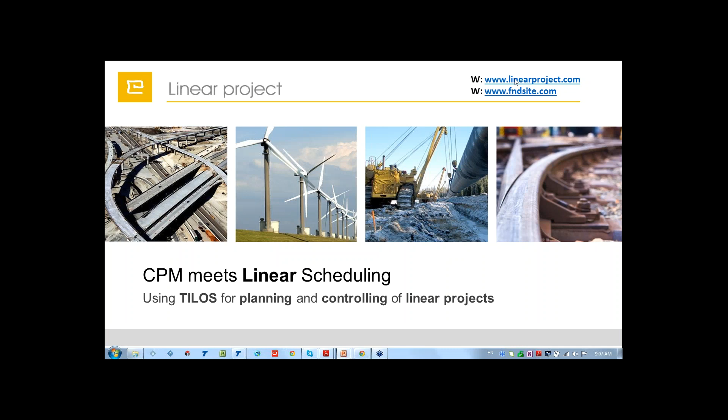So, who is Linear Project? Linear Project actually previously owned the TILOS software. It's a German product; however, it was acquired recently, at the beginning of 2015, by the Trimble company, and it's been on the market for more than 20 years. Currently, TILOS software is available in more than 10 languages, and in the market, all of the 10 major European construction companies use TILOS for their controlling and scheduling.

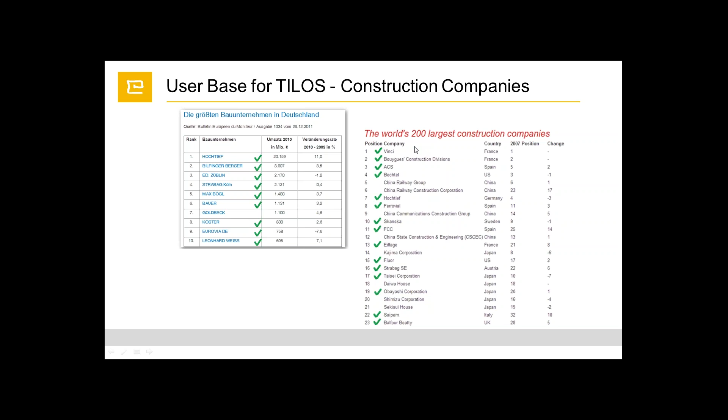Also the Asia customer map. I see we have a lot of people from Asia and Europe who are attending today's webinar. We're very glad to see you here.

So, what are linear project characteristics? As we all know, a linear project has an axis where the work is being performed. In this case, we have pipeline, railway, highway, tunneling, engineering, and transmission lines. One of the characteristics of a linear project is that we have repetition of each activity. So we have repetitive activities which go all along the project, and our goal here is to optimize the productivity rate, reduce the project duration, visualize the project area, which is very important, and I'll give you more information later on, and reduce overall cost.

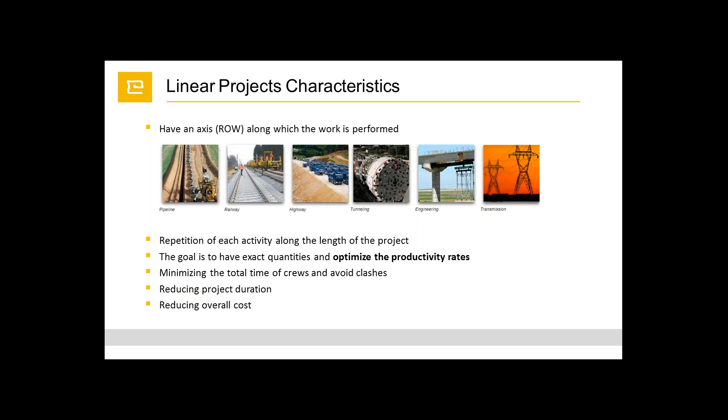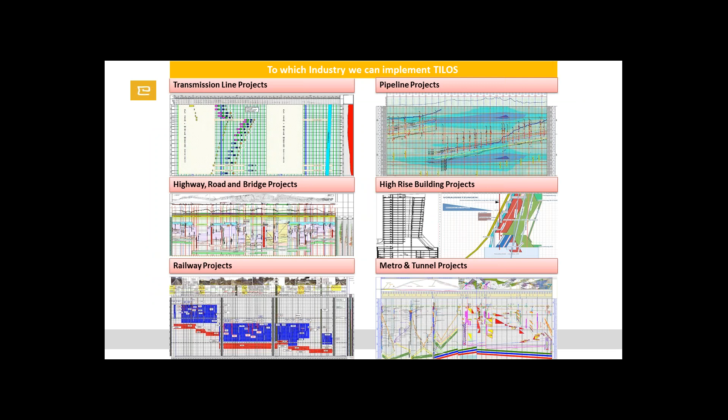To which industries can we implement TILOS? We can implement TILOS on all linear projects, such as transmission line projects, highway, road, and bridge projects, railway projects, pipeline projects, high-rise buildings, metro and tunnel projects. One of the biggest advantages, as I mentioned previously, is the visualization of the projects and the reporting. On the left side, we have a traditional CPM plan and report. It's around 40 pages, and we have everything in one page in TILOS. So in TILOS we have every information on a single page.

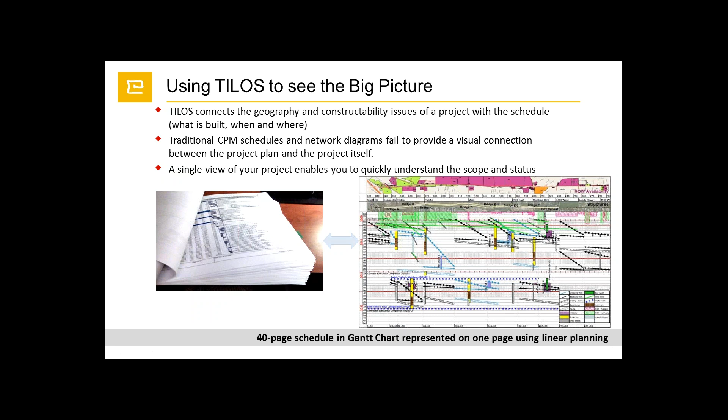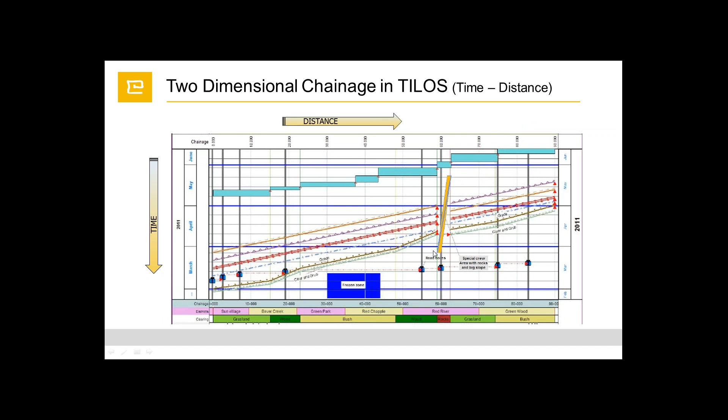I'll give you the main idea of how we can analyze TILOS reports and how we can actually prepare the work. In this slide we have a traditional Gantt chart where we have only one axis, which is time, as in Primavera P6, MSP or Asta Powerproject. However, in TILOS we have a two-dimensional chainage: the distance axis and the time axis. This way we are able to see where our activity will be performed and when.

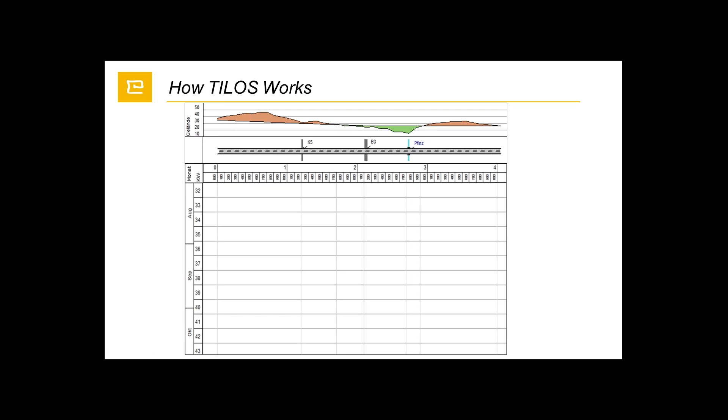So let's say we have first activities, which is the topsoil, and we are starting from the left side of the river, and it will start from 2,600 meters and goes all along to the beginning of the project, and this activity will take 3 weeks.

So by this way we are able to see, for instance, when we will be at a certain point. So let's say at 1,500 meters our activity will have to be done until almost the end of the second week of August. Then we're moving our crew to another side of the river and doing the same activity, which is the topsoiling, and it will take us 2 weeks.

Besides that, in TILOS, beside the linear activities, we can do the structural activities as well. So we have here the bridge, and we can show it as a summary task, or we can show it as a detailed bar. So all the steps of the bridge we can indicate here.

We are also able to show not only straight lines; we are able to connect these lines to the quantities. As an example here, this cutting activity has 2 breaks. And why? Because we can see on the elevation profile we have a cutting amount which is less, so it will take around a few days to complete from 1,700 to 1,200 meters. However, from 1,200 until 700 meters we have a bigger amount, so our activities will take more time to finish.

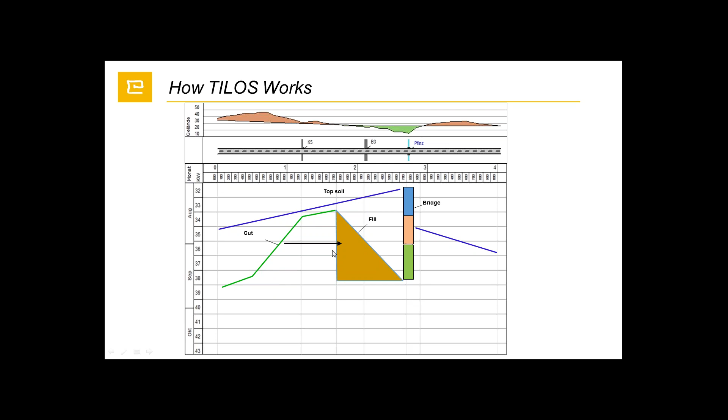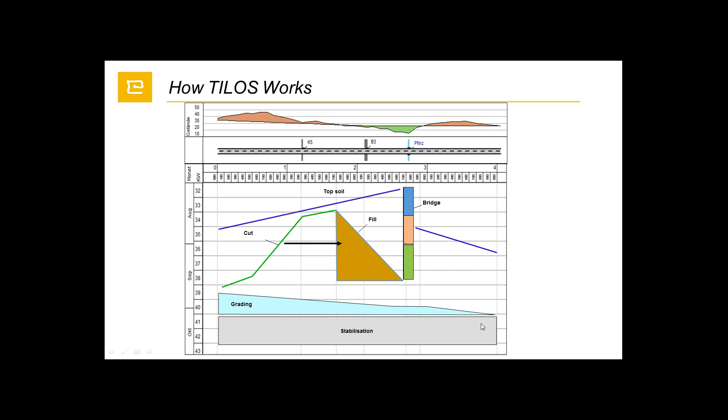At the same time we are able to put the hammock task. In this case, we are putting a rectangle here, which gives the understanding that we cannot perform any other work until we fill this area. So this area should be filled before we perform the next activities. And then we have a standard grading, which goes from the beginning until the end of the project, and the stabilization. So simply this is how TILOS works.

Beside that, TILOS gives us opportunity for clash detection. So as you see, we have here the pipeline sample. We have an elevation profile, a distance axis and the time axis. In the middle of the working area, we have a restriction area, so we cannot perform any other work during this time in this distance zone.

So let's say we have one activity, and we can see that there is a clash. This activity is starting from the beginning and ending in the middle of the project, not in the middle of this area. So we can see that we have here our clash. However, as the project engineers or project manager, we decided to postpone the beginning of our activity 1 week later, but we could also stop our work when we come to this point, and after this time passes we can continue our works.

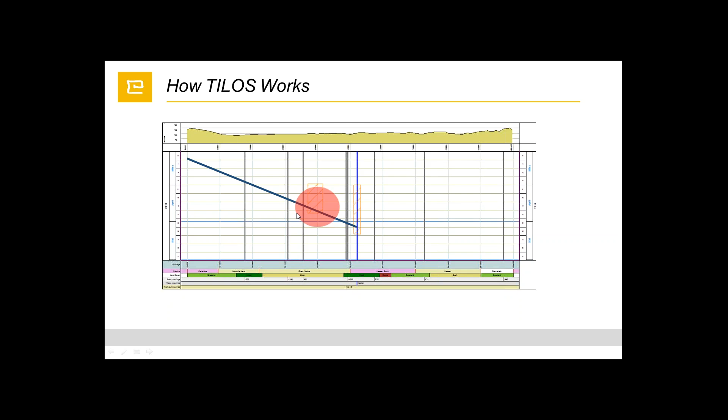However, we decided to just postpone the beginning of the activity, and in the same way we have a second activity. And I would like to take your attention to this traditional CPM scheduling. The first task is starting in March and ending almost at the end of May, and the second task is starting at the end of March and ending in the middle of June. So we cannot see any clash. However, if you look at TILOS, we can see that we have a clash.

This is actually the clash detection option in TILOS, and TILOS does not give any options for how we can solve it. It's up to the user whether he would like to postpone this activity, reduce the work rate, or stop this activity.

Moreover, we can give the lag, which the traditional CPM gives us as time-based. In TILOS we can also give it distance-based. So as you can see here, we have a minimum distance like a 2 kilometer lag. These two activities cannot be performed closer than 2 kilometers.

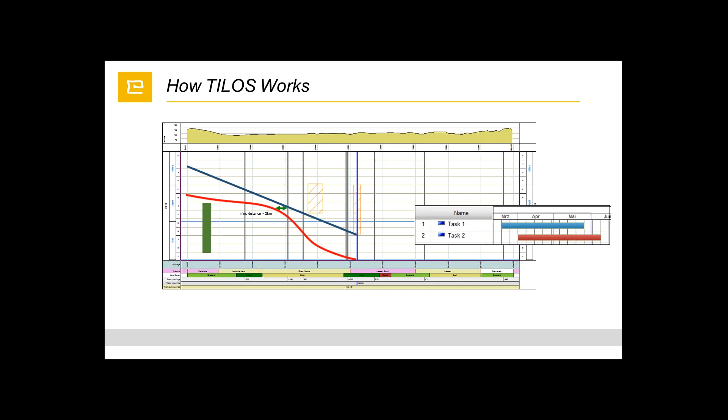Okay, project controlling. We have information including the clearing activity name, the date, the start date and the end date, start distance, and the end distance.

Beside the linear scheduling, it's also available to give a detailed report on the progress. As we can see here, we have the main activities, sorted main activities, and a data date. Also the main activities for grading, clearing, grubbing, grading. We have a progress dashboard where we can see actual progress planned, the quantity, actual quantity - all of this is editable, and we can put any information which we would like.

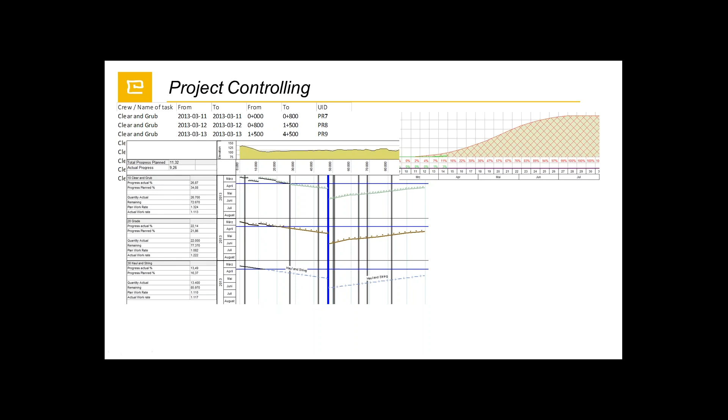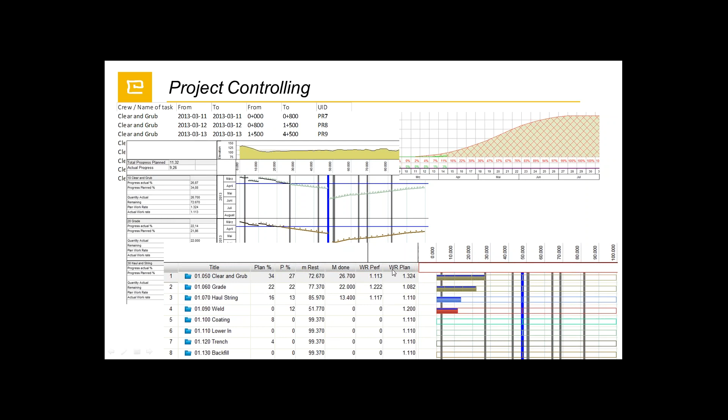Moreover, we are able to provide the S-curves, and we are able to provide the Gantt chart on a distance basis, not time based, but also distance based. So we can see here the distance, and information about our activities, which is the planned percentage, progress percentage, the work rate performance. Any information you'd like to see, we are able to display it in TILOS.

Okay, as I mentioned before, TILOS has a GIS model, which is the Google Earth integration. It's called the TILOS Progress Map. We are integrating the TILOS application with Google Earth and getting the reports directly from Google Earth. In this case, we'd like to get the visual view of our project.

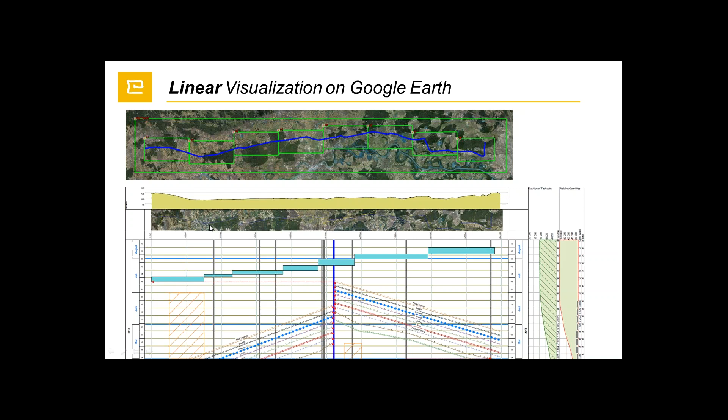So as you can see, we have a graphic illustration of our project on our TILOS working area, and we would like to see the progress. So what is the progress monitoring on Google Earth? Well, it is the ability to see the visualization of our actual progress on our working area.

So let's say we have a blue line, which is our right of way, where we have our working area. Below we have the TILOS working area, so we are indicating the main activities. In these slim lines is the main activities, which goes all along the project. So let's say on Monday 22nd of April, our crew is starting working here, or our activities are going to be performed over here, over there. These highlighted parts are where our actual crew is being worked.

Then on Monday, May 6th, we can see that our crew moved from this point to this point. Beside that, we are able to show the cumulative view. So what we have here is two crews, starting from the beginning of the project and end of the project. We are able to see that the highlighted parts are actually performed parts, and we have the rest part where we will have to do our work.

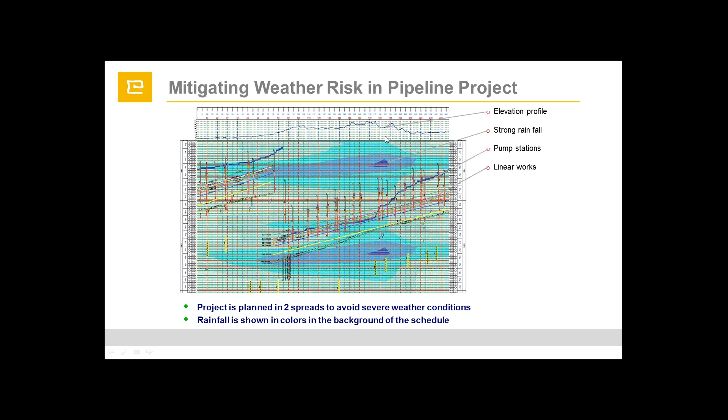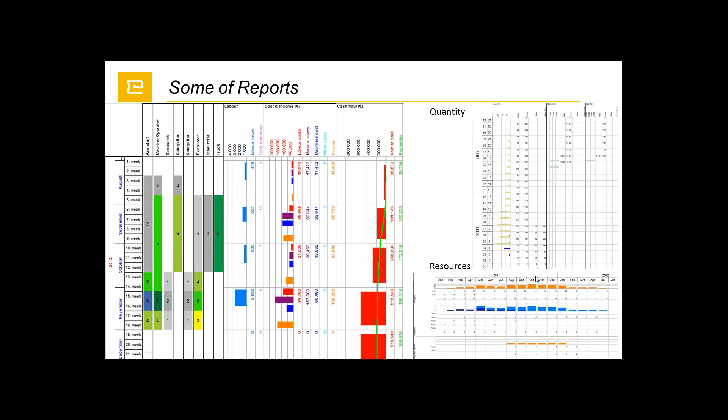TILOS has a quite good data exchange model. We are able to get data from the clipboard or from Excel. Moreover, we can get information from the most used planning tools such as Primavera P6 or Microsoft Project or Asta Powerproject. So if you are mainly using Primavera, you can use TILOS at the same time as well.

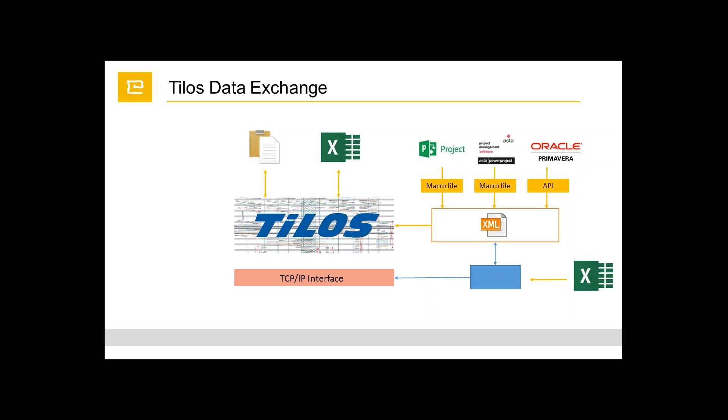I'd like to show you some of the pipeline projects which are actually being used by TILOS. This is the project which we are using. I'll give you short information and go through it.

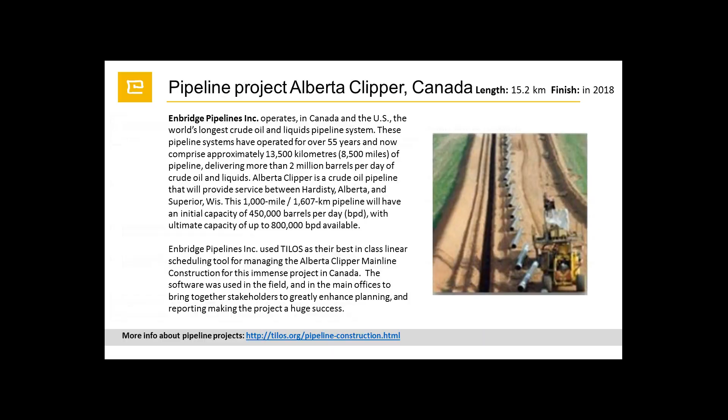This is a pipeline project in Canada. We have the Enbridge expansion, and the Chevron Pacific Trails pipeline.

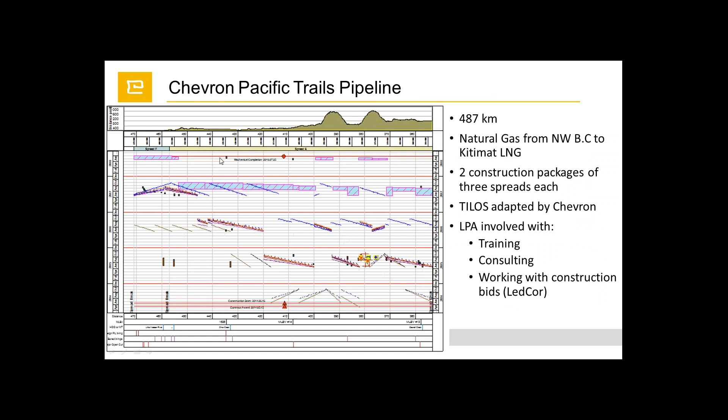As you can see, we have the distance and the time, all activities performed over our distance. We have the Energy East Pipeline Trans-Canada, which is one of the biggest pipeline projects. And we have the Trans Mountain Kinder Morgan pipeline project, the Northern Gateway, and Trans-Canada Keystone.

Czech Republic. We have a Gazelle gas pipeline.

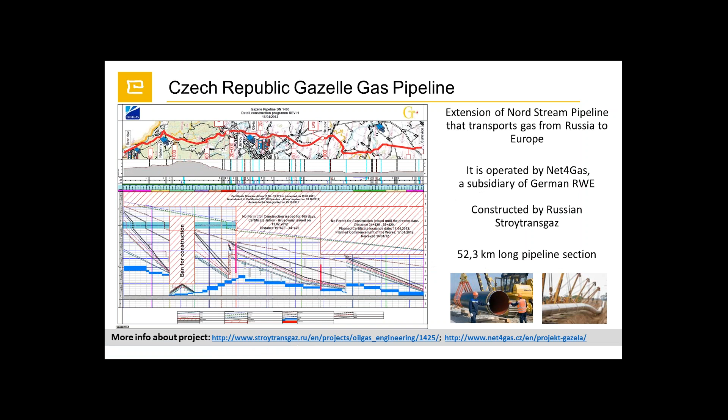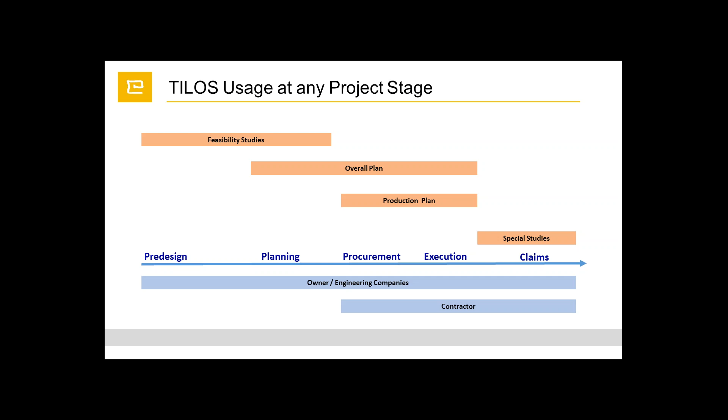Let me give you short information about where we can actually use TILOS, in which project stage we can use TILOS. We can use TILOS in any project stage. It can be feasibility studies, overall plan, production plan, special studies, and also for pre-designing, tendering, planning, procurement, execution, or even claim analysis. It can be owned by the owners, engineering companies, contractors, or subcontractors.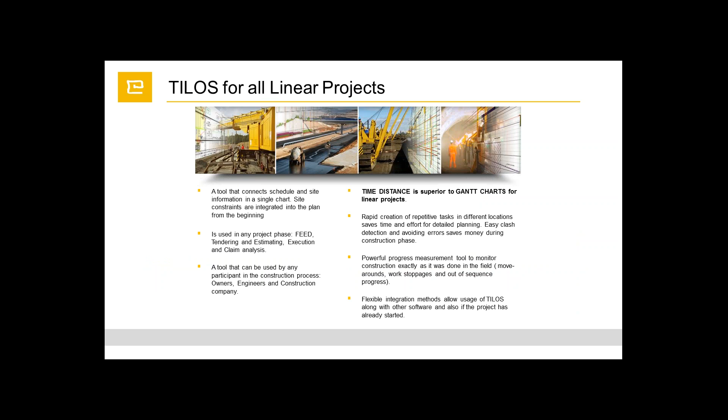This is much all about my first part of the presentation. Let's switch right now to the demonstration part.

So we have the TILOS interface. We have a ribbon, and we have the TILOS Explorer for quick navigation. We have a properties bar below, and we have the main working area here.

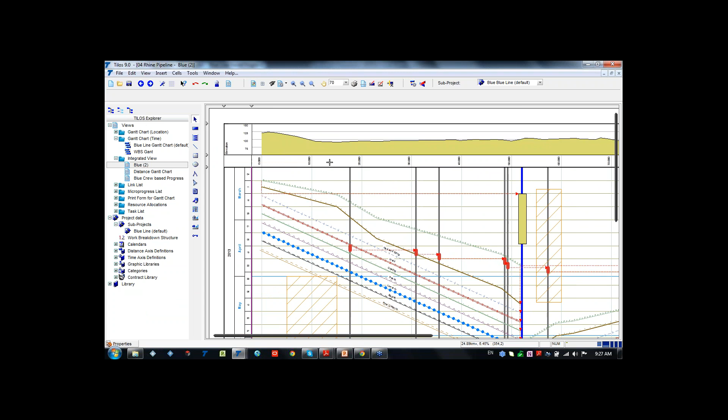As we can see here, we have the elevation profile. We have a distance, which shows this is a 100 kilometer project. Then we have a time axis.

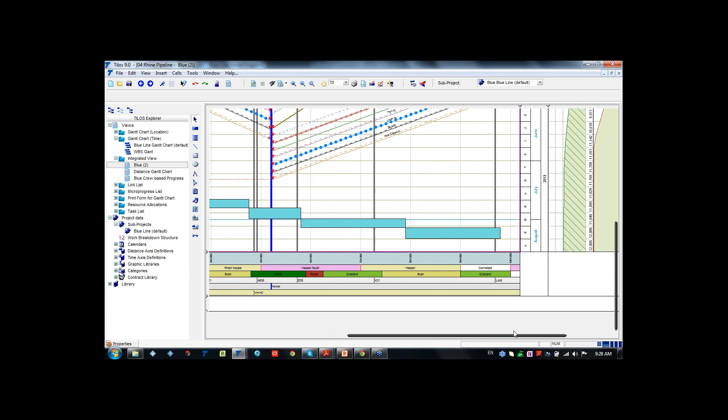We are able to show the sectors, the districts, in order to make our work easier. For instance, if you have dedicated subcontractors working on the same project, we are also able to show that, so we can divide the works on the section districts. All this information is editable according to your wish or requirements.

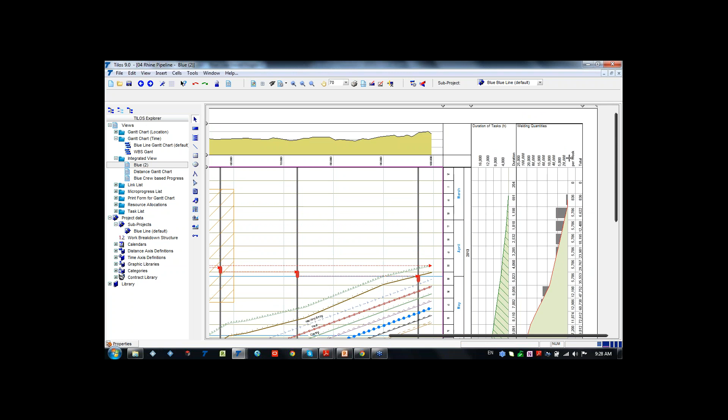We have a report, which is the duration of task reports, the S-curve. Also the welding quantities here. It can be cumulative or not.

We have the main activities here first, which is the clearing and grubbing activities, and we can easily see where our activity is going to be, the duration of the activity, the start date, the end date, even the hours. On the properties bar, we're able to see more information, such as which WBS it belongs to, the task ID, and which calendar it is using.

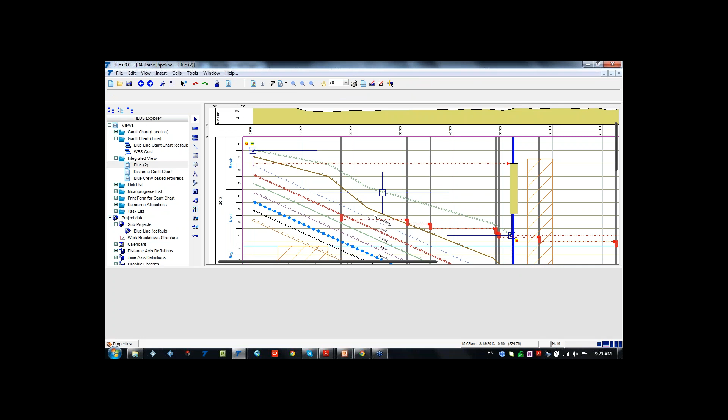The calendars are actually editable. You can edit your calendar according to your requirements. Then we have categories and structures information, the display information. This is a task which we can actually edit. All these cosmetic works are done by the user.

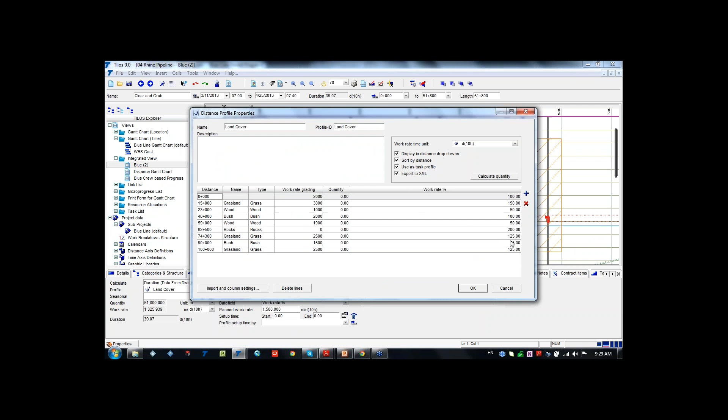The calculation method - we have several calculation methods. In this case, it's getting information from the profile data, which is a land cover, and we have all information over here. We have a work rate, the quantity, the work rate percentage. By this way, we are able to see several calculation methods: work rate, duration, length, duration speed from the profile data, from the duration from the distance profile, or from the sector profile.

We have links, we have standard linking options. Let me show you the linking options. We have here the standard linking option - it can be start to start, start to finish, finish to start, finish to finish, or calculate the meeting points. We are able to put the time lag, or we are able to put the distance lag as well.

The next activity is, for instance, the welding activity. We are able to see the coordinates here, not only from the top overview, but from the detail bar as well. We can see our allocation, resource allocation, actual. I'll show you right now - we don't have any actual data, but I'll show you the actual one.

The progress methods - some of the progress methods, such as percent split, the quantity split, the distance split, the task steps, percent simple, quantity simple.

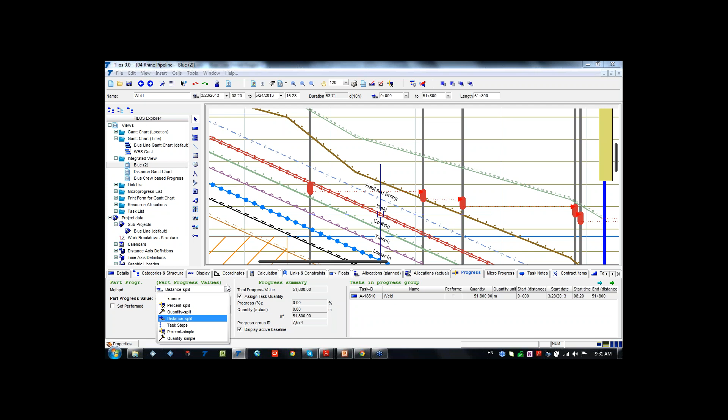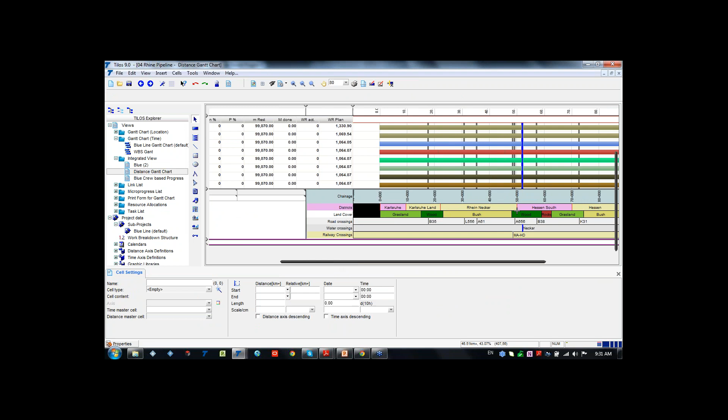Beside that, we have a traditional Gantt chart, but this time distance based. So we have main activities, or any activity you'd like to show, no problem, it's possible. And we have our activity. Also we have indicated here our sector profile and the progress, but this time we don't have any progress entered, and I'll show you in a minute the same project with entered progress details.

Main task list, we're also able to see our task list here. If we have any WBS or summary activities, we're also able to show it.

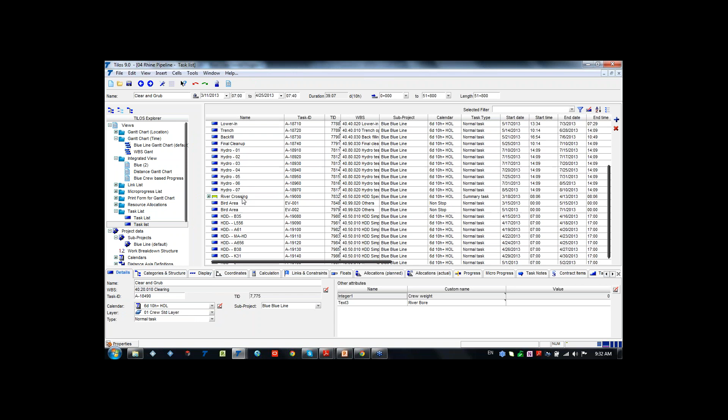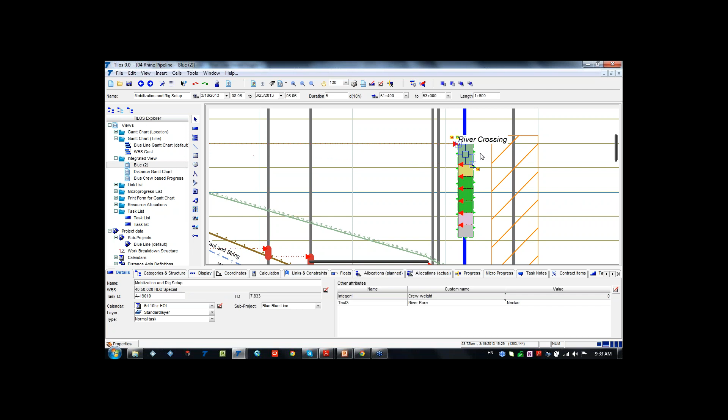The summary task on our time distance area looks like this. So this is a river crossing. Once you would like to see the detailed information, we're able to see it. For instance, right now this is mobilization activities, this is pilot hole, reaming, and so on. So once you don't need to see it, you can just switch it off, or hide it if you would like.

Okay, let me show you right now the example with the progress entered. As I've shown you previously, we have a dashboard here. We have information about the activity. We have entered our activity. We have a data date here. We have entered our baseline and actual information.

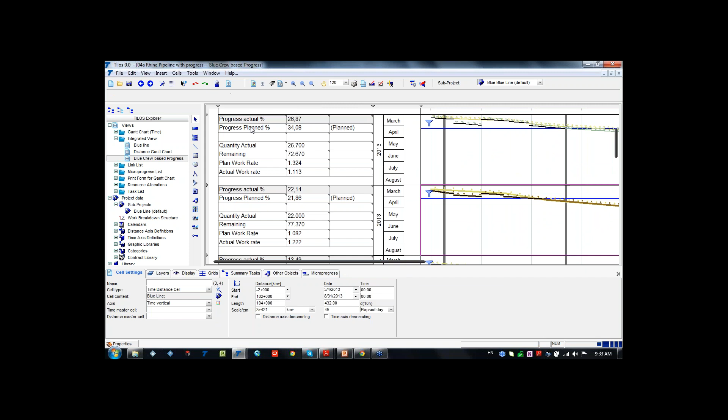By the dashboard, we're able to see progress actual, progress planned, then the quantity actual, or remaining part, the work rate. So all information is available in order to prepare good planning or scheduling.

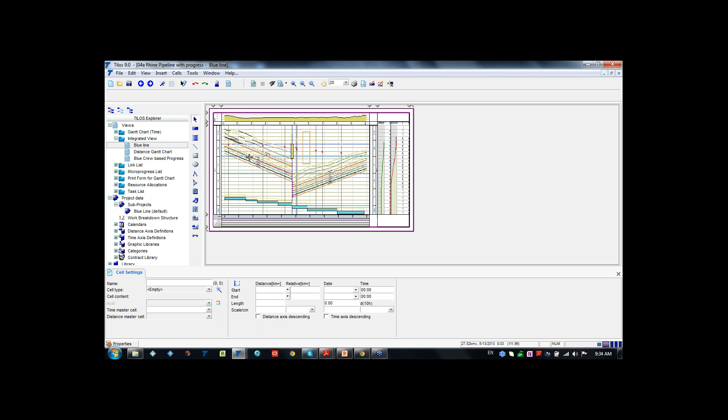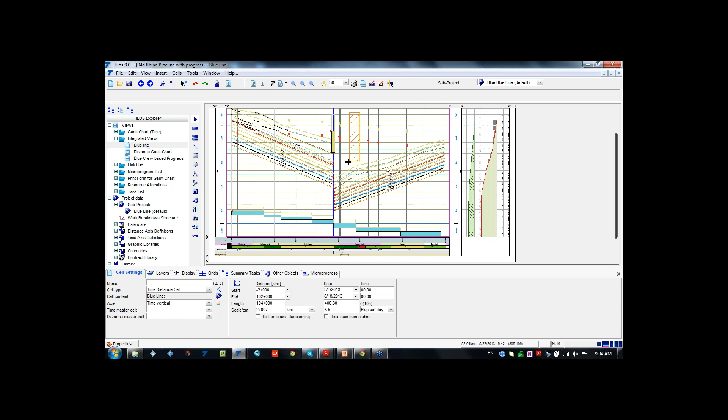On a distance Gantt chart, all this information is simultaneous. Let me show you how it actually works. By this view, we are able to see that all the information we are entering in our working area is synchronized with the elevation profile, or with the data, with our histograms. So if you change any information here, for instance, it will also be changed on our Gantt chart.

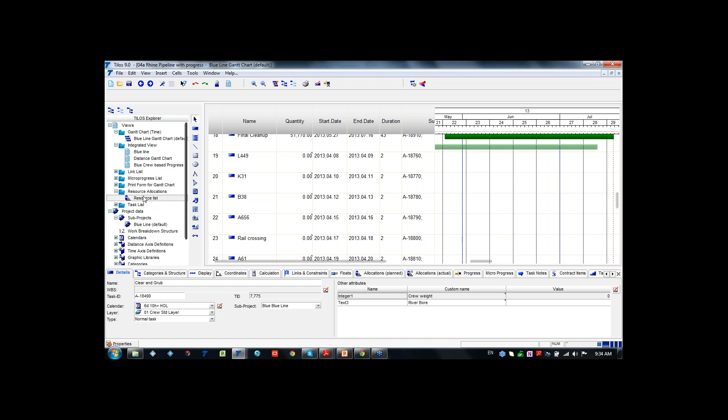Besides that, we have a traditional Gantt chart, which is time-based. We have a resource list. All this information as well we can edit, this is up to you. We have calendar information. We can indicate the non-working times, some exceptional days such as holidays.

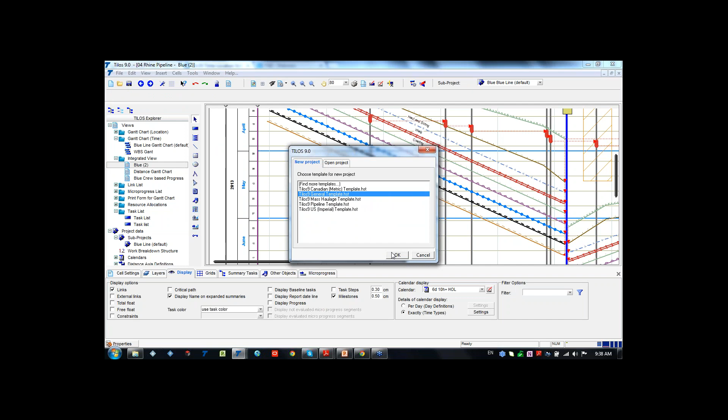Then TILOS will give us, we'll have to give the name of the project. Then we can choose a distance unit. It can be changed later on if you would like. The start distance, the end distance, the start date, end date, the time unit, all information right now, even if you select it, you can edit it later on. Then we have to save it.

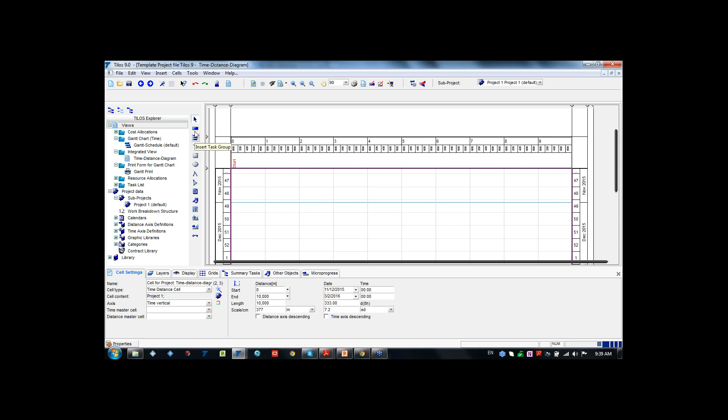So as the question was how we can add the activities: we can add activities by clicking on insert task, or we can even insert the task group. So if you have a repetitive activity, let me first add the task. Once we add a task, I would like to select the task over here. We have a task library. This library, actually we have it from our template, but you can edit it, you can add there, remove it, or adjust it as you like.

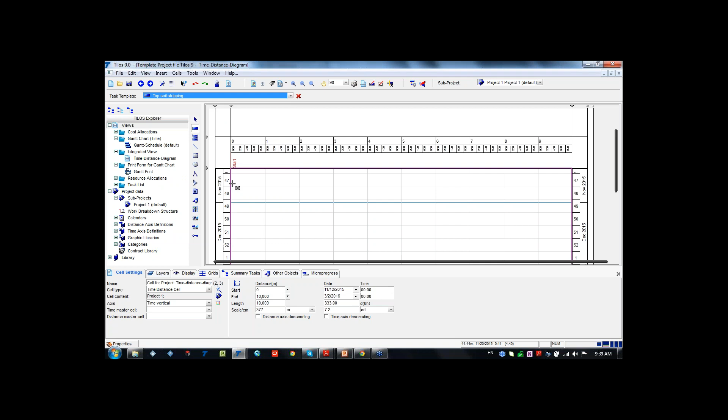So let me choose from the earthworks, let's say the topsoil stripping. So by dragging my task, I'm able to put or insert my task.

Beside that, all this task information, like the duration, it can be 30 days, so it will adjust automatically. Or, for instance, starting not from the 0 kilometer, but 1,200 meters. So all this information is editable, or we can even change the end date. It might be in 2016 February.

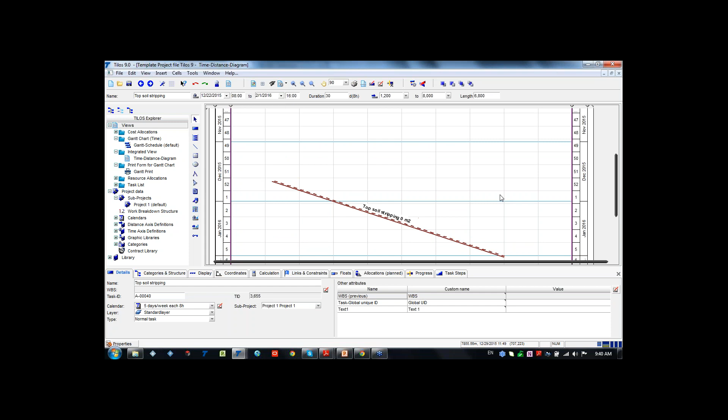Okay, so what we have here is the information about the task. The task annotations are also editable. In these task annotations we can have the quantity, if you have any quantity on your task, it can be the name, it can be the end date or start date. Let's say the end date we have as a schedule.

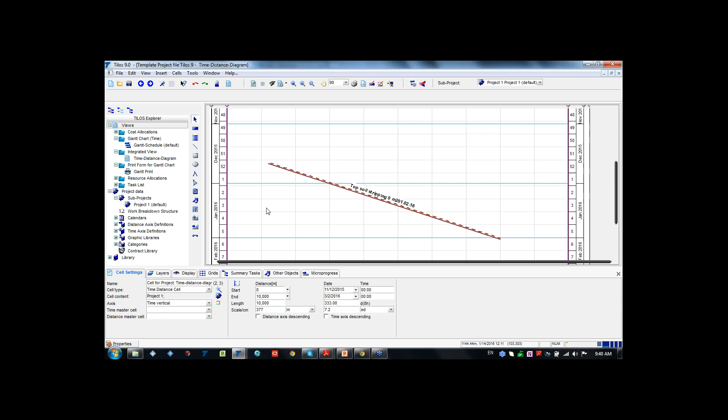Okay, so right now we have an end date, so it will end on the 1st of February 2016. Then we have, as I said before, task groups. So once we would like to enter the task groups, let's say we have predefined the task group. It can be the path, it can be a canalisation task group, and we would like to enter it as, let's say, the distance profile.

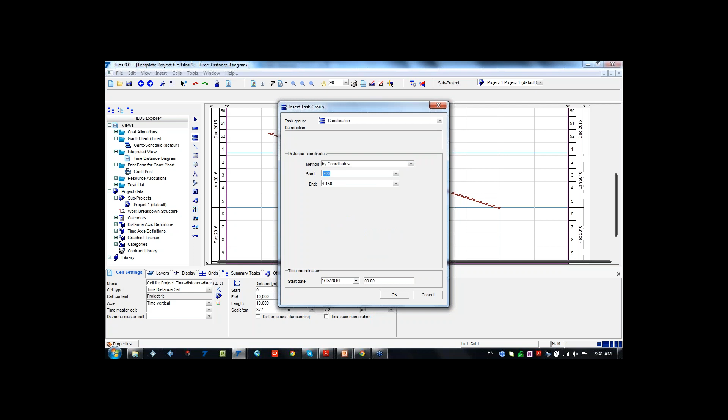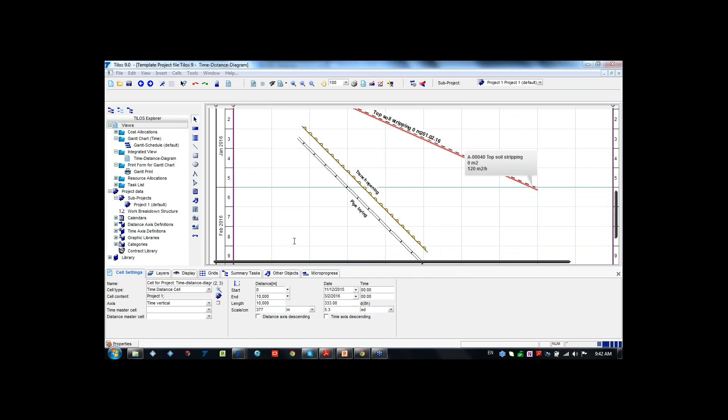So in this case we have imported location points, but I'm not sure. No, we don't have imported location points, so we'll not use a distance profile, but we'll use coordinates. So let's say we're starting from 700 and we'll end at 4,150 meters. Okay, so once I've entered here, where I have task groups, I can edit it, I can remove it. This is all up to you how you would like to have them. Okay.

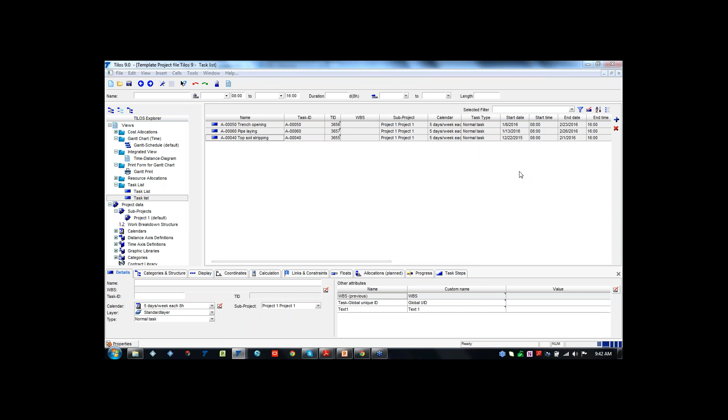Mr. Ibrahim asked me how we can export the information to Excel. So we can actually export it by File and Export. We have some abilities to export as a Primavera XML, to Excel, or the Excel data exchange, to XML as well for MS Project or Asta Powerproject, or as plain text.

In this case, I would like to have some Excel report. So I'd like to export a template file. I don't have any template file here. So let me choose one. Let me create one Excel file. Okay.

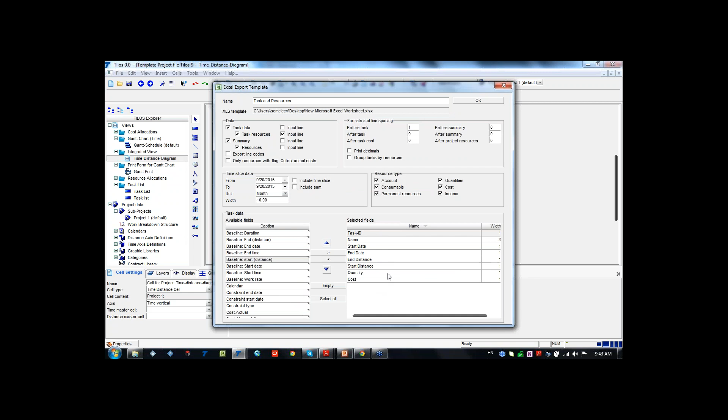So in the export information, we can select the exchange profiles. In this case, we can select the information which you would like to see. Actually, you don't need to export all information, but here we have some information which we can export. I don't need the baseline information or calendar information, so I'll not choose it. So what we have here: the task ID, the name, start date, and distance. If it is cost loaded, we can export the cost or the quantity. Okay.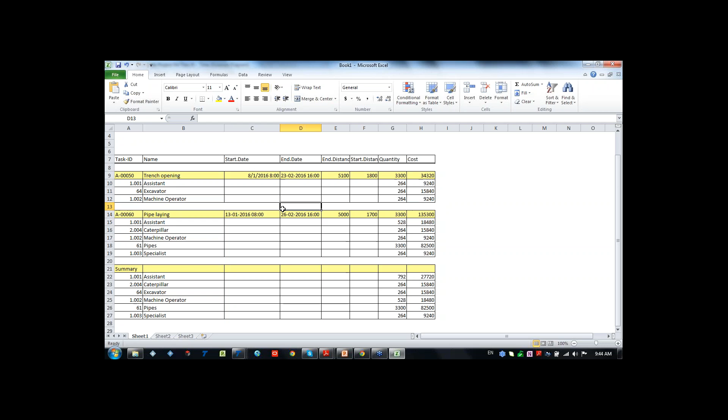Okay, I think we have some other question. Mr. Zahid asked if we can make first the WBS and then activities inside it like in P6, and then add all activities here. So no problem. If you have done your planning or scheduling in P6, you are able to get it into TILOS as well. With all the information you have in P6, you can export it and import it in TILOS.